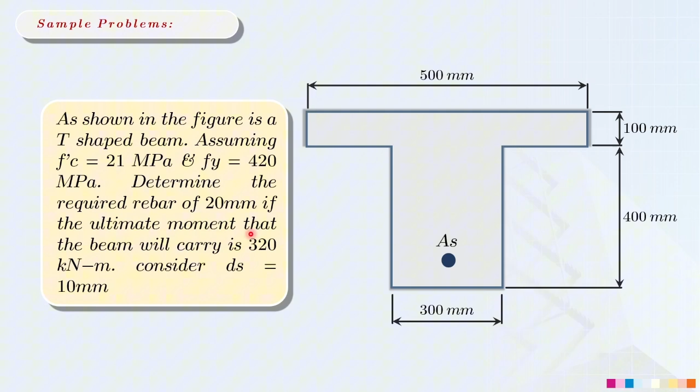Alright, so same pa rin yung ating section. However, minodify ko lang yung dimension dito. From 800, ginawa ko lang siyang 500. So same pa rin yung kailangan nating hanapin. We need to determine the required number of 20 millimeter diameter if the ultimate bending capacity is 320 kilonewton meter.

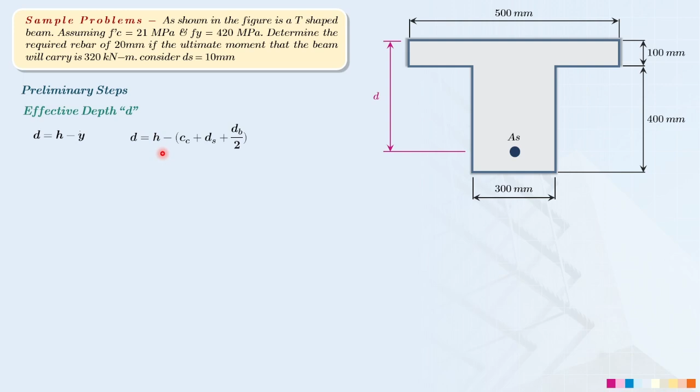Okay, so same pa rin yung step na gagawin natin. We need to determine first the effective depth. So our effective depth here is just simply subtracting the total height to the location of centroid. By the way, yung height natin dito is 500 millimeter. Then subtract lang natin yung concrete cover of 40, diameter of stirrups which is 10, and the half of the main reinforcement which is 20 over 2. Okay, so same pa rin yung makukuha natin as our effective depth, and then proceed tayo with the value of our beta 1.

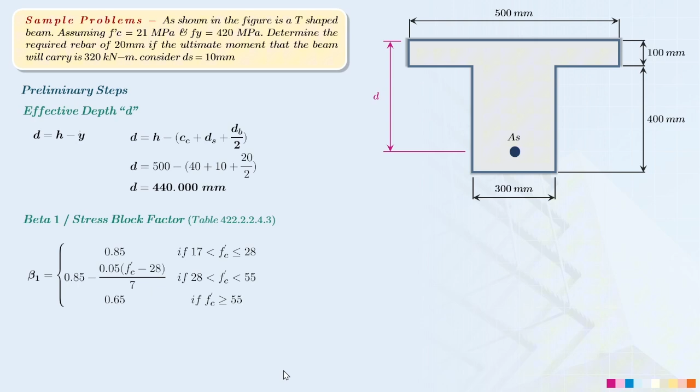So yung beta 1 natin dito is 0.85 dahil po yung 21 megapascal is between 17 and 28 megapascal, so that 0.85 yung gagamitin natin as the value of the beta 1.

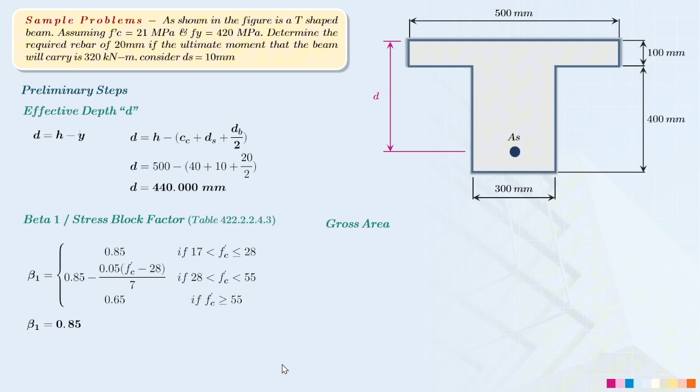However, for our gross area, sabi ko nga ulit, kung ano yung sakop ng height for our effective depth, yun lang po yung magiging computation natin for our gross area. Okay, so ibig sabihin lang nito, dito sa upper part, which is 500 times 100, then i-add lang natin yung area nung nasa baba. So para makuha mo yung height na nandito, so you need to subtract yung 440 sa 100. So yan yung magiging height natin. Then multiplied by 300, and then adding this first term, ang ating gross area, this is now equal to 152,000 square millimeters.

Okay, dahil yung next step nga natin dito under this preliminary step is we need to determine yung moment capacity at the offset dimension. Very important yan in our comparison kasi ang binabantayan natin ditong height is 100 millimeter. This offset dimension para malaman natin if yung value ng A lalagpas ba siya or hindi.

Once again, kapag yung ating moment capacity at the flange is mas mataas dito sa ating demand moment capacity natin, ibig sabihin lang po nun, kaya ng flange nating dalhin yung given na moment demand natin. Ibig sabihin lang nun, in terms of height A, mas mababa siya sa 100 millimeter, ideally. Pero kapag mas mataas yung ating given moment doon sa ating moment capacity at the flange, ibig sabihin lang po nun is hindi kakayanin ng flange natin yung demand from our moment. So that the height of A should be greater than 100 millimeter. So yan yung babantayan natin.

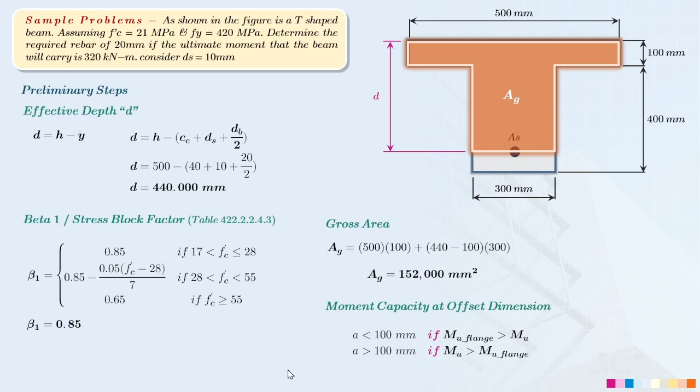So let's compute first for our moment capacity at our flange section, yung nasa itaas. So by just simply taking the area of compression dun lang sa mismong flange, and then yung ating moment arm. So please take note that this variable or this term, obviously, this is the half of the 100 millimeter going to the center or the centroid of our main reinforcement. So kunin lang natin yung ating moment at the flange.

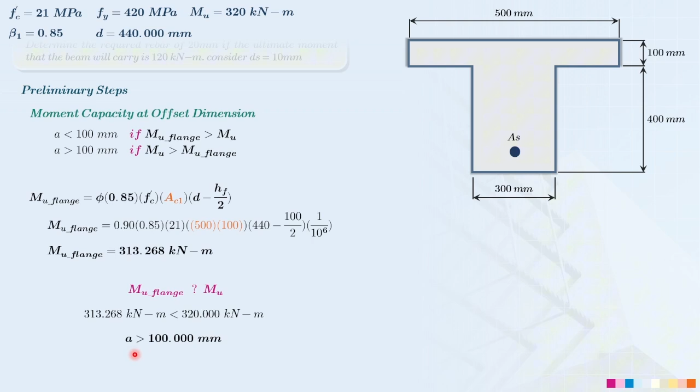Ibig sabihin lang nito, this is now equal to 313.268 kilonewton meter. So in comparison with our ultimate moment strength or yung ating demanding moment which is 320 kilonewton meter, ibig sabihin lang po niyan is hindi kaya ng ating flange yung demanding moment natin. Ibig sabihin lang yan, in terms of height, this is greater than 100 millimeter. So ibig sabihin lang po nun,

Ito po yung ideal itsura ng ating area of compression, this part. Kasi nga, hindi kinaya ng flange natin yung ating demanding moment. So ibig sabihin, in terms of A, yung height natin, dapat lalagpas na siya ng 100. Okay, so let's have the steel area limit. Okay, so same pa rin yung ginagawa natin.

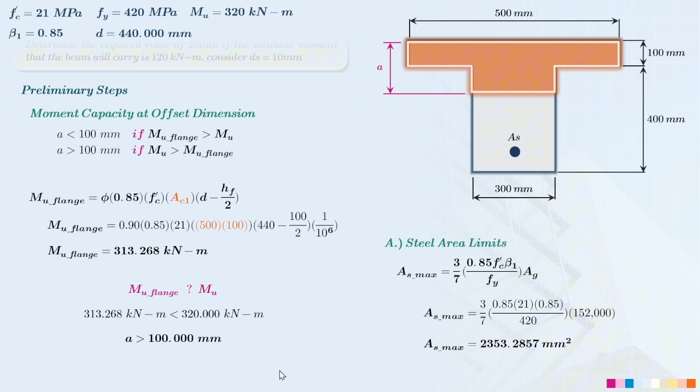So for our maximum steel area, this is now equal to 2,353.2857 square millimeter. While for our minimum steel area, which is the first minimum steel area in this formula, ang makukuha natin dito is 414.614 square millimeter. While the second minimum steel area, this is equal to

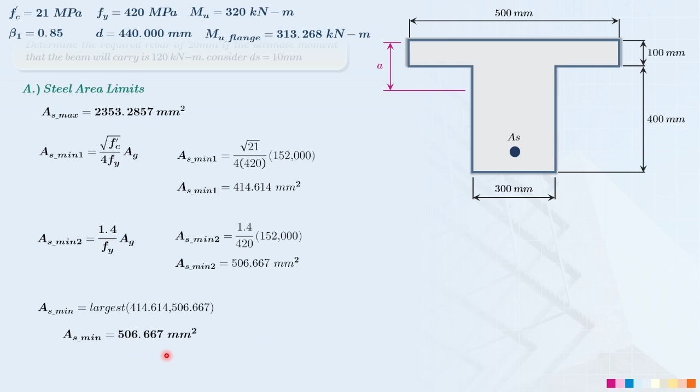506.667 square millimeter. Now, in the determination for our minimum steel area, this is equal to 506.667, the largest among these two values of our minimum steel area. And then we can now already solve for the actual steel area. Ideally, the height of A should be greater than 100 millimeter.

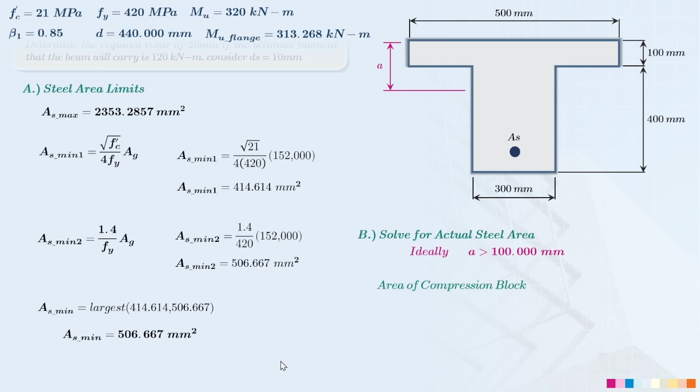So para makuha natin yung area of the compression block, hahatiin natin yan sa dalawa. Una, yung sa flange, which is 500 times 100. The second one is yung nasa bottom part, which is A minus 100 times 300. Yung, kumbaga, ginawa ko yung total, pinaghiwalay ko lang siya into two terms.

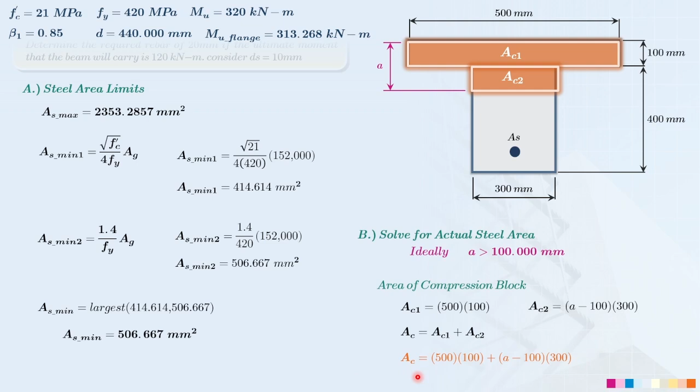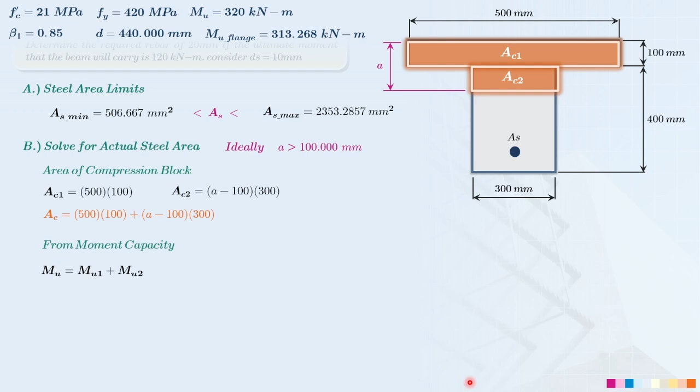So that kapag pinagsama ulit natin sila, ito pa rin yung magiging area of compression natin. Kasi importante yan pagdating natin dito sa computation for the value of A, which is from our moment capacity. Ang kailangan natin gawin dito is magko-consider din tayo ng dalawang klaseng moment. So, yung first moment natin, which is the moment at the flange, yung na-compute natin earlier. Then, yung second moment natin is yung retaining moment natin.

So, makukuha natin ang retaining moment natin kapag pinag-subtract natin yung demanding moment kaysa doon sa ating moment capacity at the flange. So, by simply subtracting this one, ang makukuha nating retaining moment, this is equal to 6.732 kilonewton meters.

Alright. So, magpo-focus lang tayo dito sa second area of compression natin since ang pinakapakay lang natin dito is the retaining moment, para ma-solve natin yung value ng A. So, ito yung gagamitin nating formula for the second moment capacity natin, no?

So, which is yung ating second area of compression, which is below the 100 millimeters, and then yung kanyang moment arm. Our moment arm here, please take note that this is effective depth minus 100 minus yung kalahati ng A minus 100. Okay? So, by simply substitute yung mga nakuha nating value, so ang makukuha natin dito is nasa 104.134 millimeters, which is greater than 100 millimeter.

It satisfies the condition. Okay, now let's proceed na sa ating equilibrium condition. Sa ating equilibrium condition, ideally, dapat mas mataas sa 100 millimeters yung makuha nating value ng A, which is we already get as a value of 104.134.

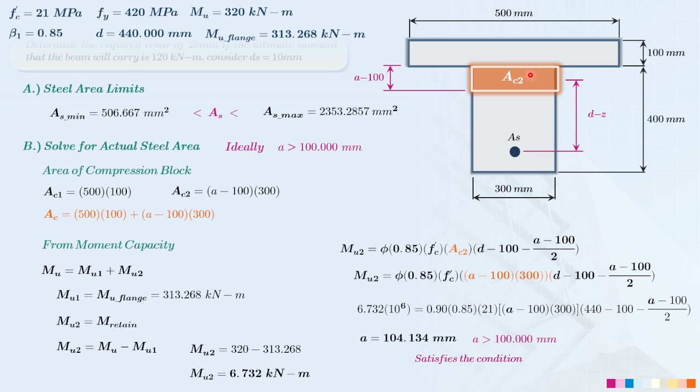So, of course, we need to substitute yung ating area of compression. Please take note na yung area of compression na gagamitin natin dapat yung buo na itself, hindi yung katulad dun sa moment na ginawa natin kanina. Kasi nga, ang ginamit lang natin dito is the retaining moment. That's why yung area ng compression lang na gagamitin mo, dapat yung second area of compression lang. However, pagdating natin sa equilibrium condition, dapat yung total area of compression na mismo yung gagamitin natin.

So that yung ating steel area, this is equal to 2,177.705 square millimeter. In comparison, between these two steel area limits natin, lumalabas na yung minimum natin is hindi siya bababa, and then yung ating in terms of maximum, yung ating actual steel area, hindi rin siya lalagpas. Ibig sabihin lang yan, we will use this steel area of 2,177.705 square millimeter.

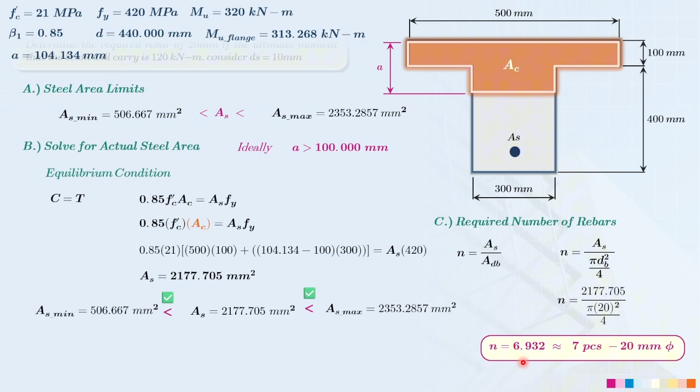So that in order to determine the number of reinforcements, what we need to do here, we need to just divide this total steel area sa isang area ng 20 millimeter. So by simply substituting it, so the number of reinforcements that we need to use is 6.932 or 7 pieces of 20 millimeter diameter.